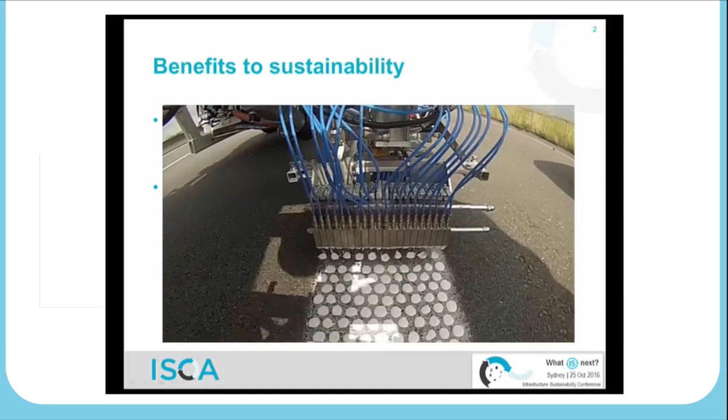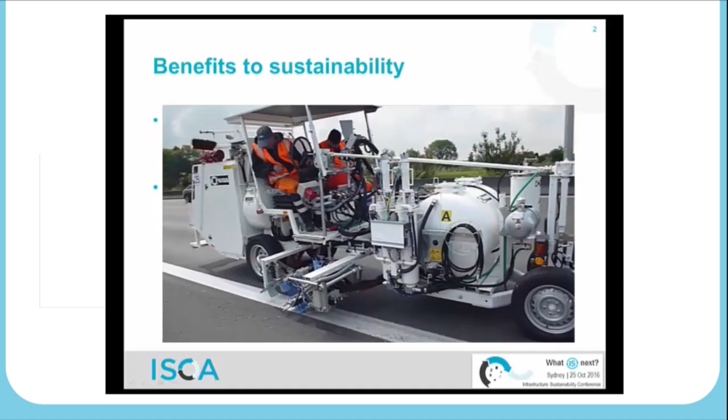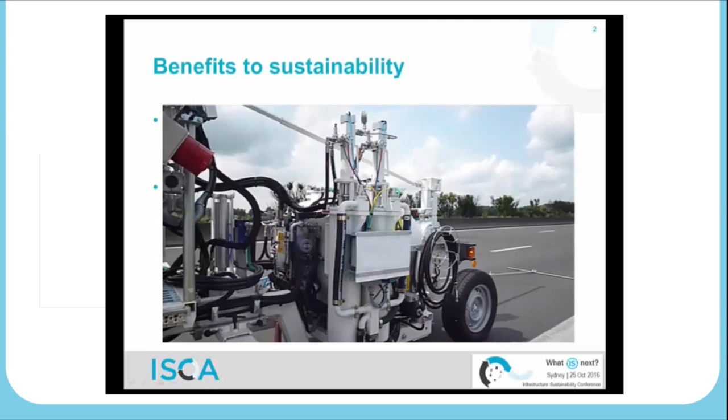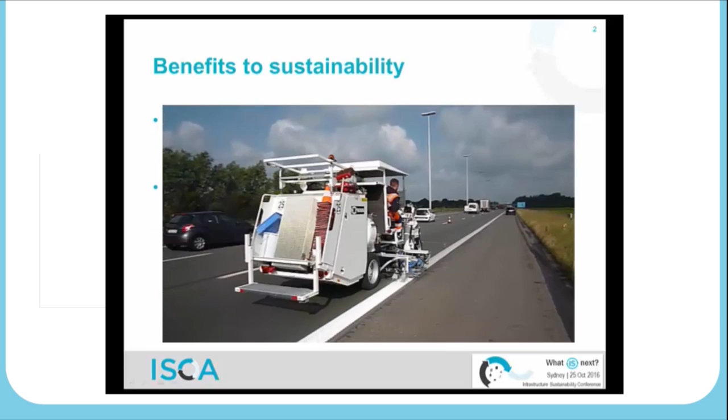We discovered by making minor changes to how we plan and reuse materials, there was an incredible opportunity to innovate our future infrastructure projects for big dollar gains from relatively small type road treatments. Which is why we are here today proposing use of a common road marking material, line marking. We're combining this with new technology and changes to product design. The concept is to swap the currently used waterborne line with cold applied plastic line, or CAP. With CAP, the product life is predicted to be 6 times greater than waterborne. So rather than mark roads every year, why not once every 6 years? Within the Perth metropolitan network, with 1,200 kilometres of roads, this equates to 20,000 kilometres of line marking. CAP's advantage is it enhances existing lines, allowing the reuse of existing lines, therefore saving removal costs.

So what are our sustainable savings in changing the way we mark our roads? By swapping to CAP material, the equipment used to spray CAP line marking equates to a saving of 606,000 litres of diesel, or 271 tonne of carbon emissions per year. However, with our materials in WA freighted in from Australia's eastern coast, once we add the shipping cost to transport material to Perth, the fuel saving increases to 7.1 million litres, or 3,170 tonne of carbon emissions saved per year. Now this doesn't include the fuel of delayed public traffic, or frustration associated with remarking lines, nor the improved safety or reduced maintenance cost.

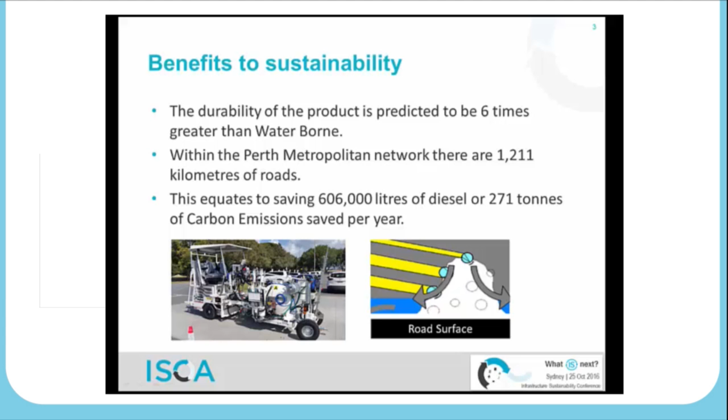Also, we save 200 tonne of line marking material for the Perth metropolitan area over 6 years using cold applied plastic. So when we add in also the potential crash cost saving using a willingness to pay approach, preventing killed and seriously injured crashes, there is a potential saving available of $179 million. Now in closing, what other opportunities do we receive? With a change in product design, we get improved safety. There's clear, better nighttime visibility using a spot design. And combined with driving in wet conditions, there's improved surface drainage, with a change in design going from a flat to spot surface line, where visibility is important, which anyone in Sydney and Melbourne can confirm with your long winters and cold temperatures compared to Perth's.

There's lower consumption of solvent. There's also no heating elements required, which will minimise burns and eliminate additional fuel use. So there's a saving there. And also reduced cleaning work of equipment. And this leads to greater efficiency. Now, what's occurring overseas?

Well, our overseas research comparing available line markings indicates the most environmentally friendly solution is CAP, with the lowest carbon footprint. Now, this study was performed by Dr. Alexander Klein. He looked at water, thermoplastic, CAP and solvent lines.

So how serious are Main Roads, or is this merely a flag-waving exercise? We will commence in November the first large-scale 6-year research trial on freeway standard roads comparing materials that will consider how changes in decisions can lead to better sustainable outcomes. Thank you for your interest.

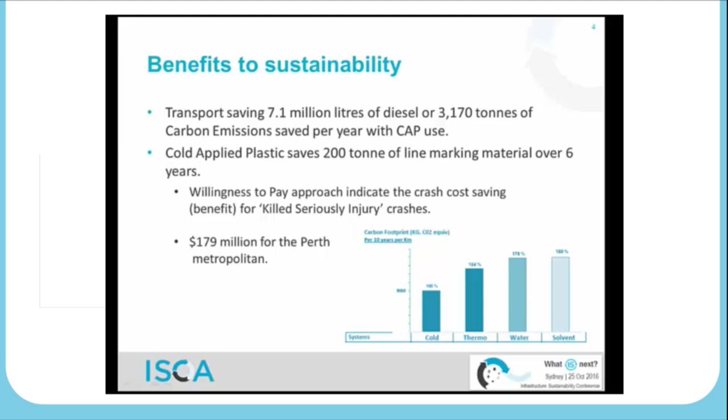Yeah, we've got the clapometer, so we'll use that to score people. Okay, so I think we'll go to Kate Harris now, and I'll pass you the little... All right, you can nick off now. Thanks. Yeah. Well, we haven't got any prizes. Okay, you know, fear really.

Of Donald Trump. So I just want to confirm that, yes, materials, number one, do matter, but there is also a real challenge. I hear the challenge around the supply and demand dilemma all the time. So I'm coming from a perspective of speaking on behalf of a lot of those manufacturers. Good Environmental Choice Australia is the Type 1 independent ISO 14024 eco-label. And I'm just back from a global conference with many countries around the world with the same dilemma.

But today we want to talk about concrete solutions of concrete. And I'm actually speaking on behalf of one of our licensees who's had a certified product for many years with GECA, as we're affectionately known, which is Independent Cement and Lime. And James Howard is here somewhere. So if you throw your hand up so we can all pester you later, James is over there.

So I guess the message today in 5 minutes is quite brief: there are already existing solutions. It's a call for more innovative designs for sustainable production and consumption solutions. We're very committed to SDG 12 and see infrastructure as a huge component of that. And if you have a look at cement and concrete being 5% of the world's CO2 emissions, that's no small figure and leaves a big opportunity for infrastructure to respond and do something about it.

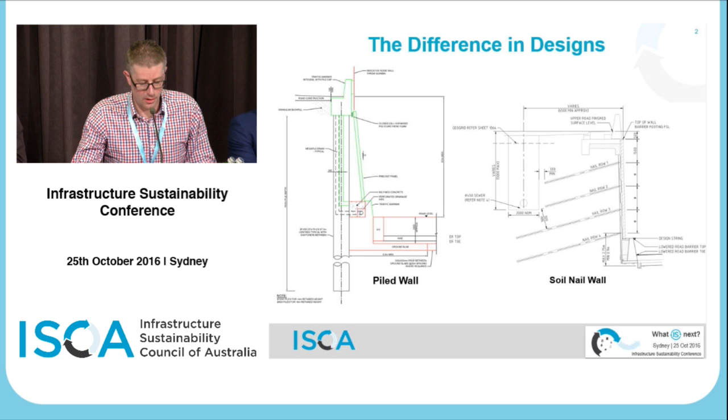Although soil nails have been used extensively in Adelaide before, they were for the old design rules, and they typically have quite closely spaced nails in the order of 1.5 to 2 metre centres, and thick shotcrete, 150 millimetres thick and conventionally reinforced. After an exhaustive amount of design effort and a rigorous independent review, our revised approach resulted in a solution having nails at 2 to 3 metre centres, and also incorporated a much thinner 75 millimetre thick fibre reinforced shotcrete facing without conventional reinforcing. The reduced shotcrete thickness was possible as we developed an alternative design approach which allowed the nails to slip slightly under swelling load, hence relieving any design pressure on the shotcrete.

Here's a summary of the material savings from the final design as opposed to the reference design. For comparison purposes, similar structural elements common to both solutions, such as architectural facades, traffic barriers, etc., have been ignored from material quantities. You can see there was an 87% reduction in total tonnes of concrete, and this flowed through to a 98% reduction in total tonnes of steel reinforcement. This reflects that piled solutions have quite heavy reinforcement, whereas the soil nail solution only has reinforcement locally in the nails themselves and at the nail head locations.

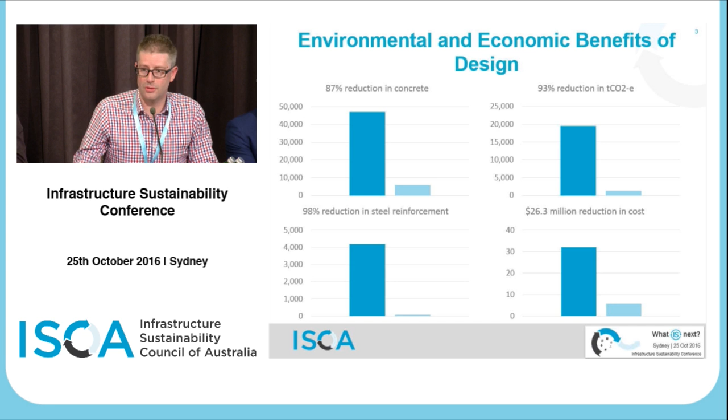From the materials calculated, this resulted in a 93% reduction in total tonnes of carbon dioxide. And, not surprisingly, this has had significant capital cost savings to the project in the order of $26 million between the reference design and the final design. So just to summarise, there are obviously a huge number of social benefits and legacy items. The soil nail wall solution reduced construction time of the retaining wall itself by 312 days, and this flowed through to reduce the overall construction program by about 9 days.

Soil nailing is a lot less noisy and a lot less obtrusive than piling, and as the excavation progresses, the soil nailing occurs below ground level, and you essentially have the cut face which acts as a noise barrier. The revised design rules have now been adopted as DPTI standard, and they're being used on the Darlington project at present, applied to both piled retaining walls and soil nail walls there. Also worth noting that there's 15 kilometres of this corridor yet to be upgraded. The design approach is transferable to other regions where similar soil and climatic conditions exist.

And finally, this revised design approach is being presented to industry through a full-day seminar by the Australian Geomechanics Society and Engineers Australia in Adelaide. This seminar incorporated a number of worked examples, so this has left a great legacy to the industry.

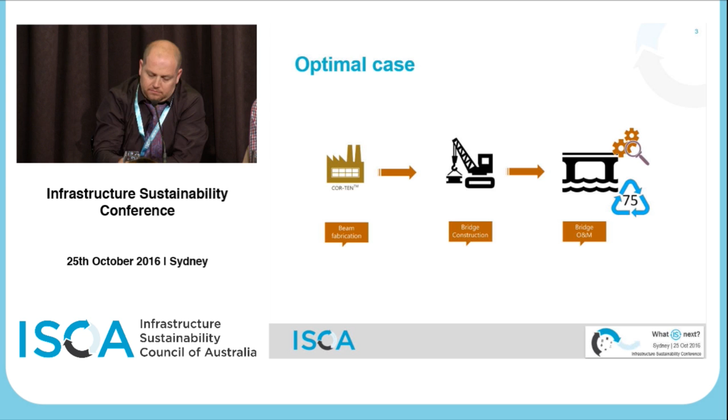But of course, selecting weathering steel for use in infrastructure assets, whether it's bridges or facades or other infrastructure, there's a number of influences that we need to get right, and it really is in the detail. So not everyone likes the look of rusty steel, and it can be a little bit off-putting. Hold on. But then some people do.

We need to consider things like access. So if we've got infrastructure going over large rail corridors or very busy highways or over very busy waterways, we need to consider whether that access is going to create a significant cost over the life cycle of that piece of infrastructure. We also need to consider the environment that we're building that infrastructure over. Weathering steel is not particularly happy when it's exposed to coastal environments, so weathering steel has its limitations in that regard. It really doesn't like to be in environments that are close to the coast, and in that regard you might need to paint it if you were going to use it, so it sort of reduces the benefits.

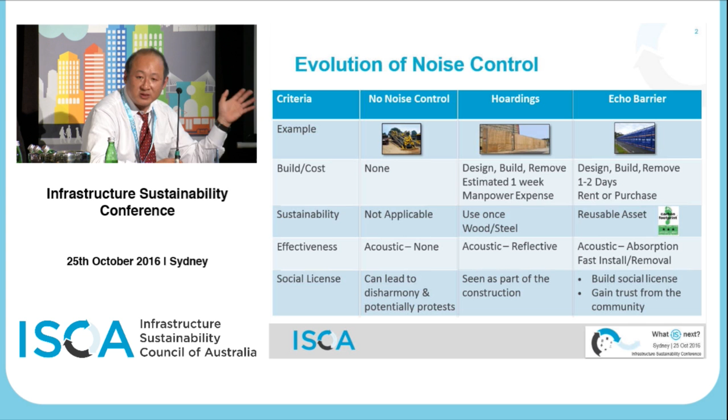Now, net impact of that: with hoardings, it's basically seen as just part of construction. Everyone just sees it as, oh, they're just building something there, and they just put this wood around it, and that's fine. They don't see it as being a way of reducing the noise impact on them. However, because of the bespoke nature of a branded barrier that actually has noise control system written on it, people have a different perception. They basically see that something is being done for me. And then suddenly the angst that people get changes. And it's all about communication and how people get communicated through the visuals of the system.

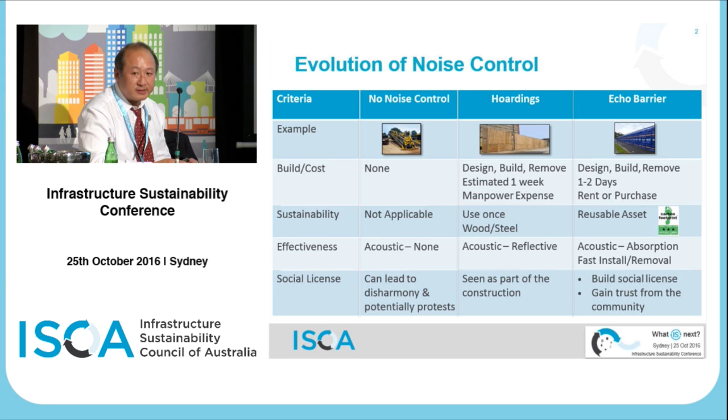Now, I'm going to go through and show you a video now of a project that we did. It was just in a suburb here in Sydney, up in Narrabeen. Yeah, let's go through that.

We're undertaking a horizontal directional drill from Wetherill Street, directly behind us, 800 metres south out into the Pacific Ocean. This drill is for Telstra, which is a telecommunications cable. It's called the Tasman Global Access System, which is linking Raglan in New Zealand to Sydney here in Australia.

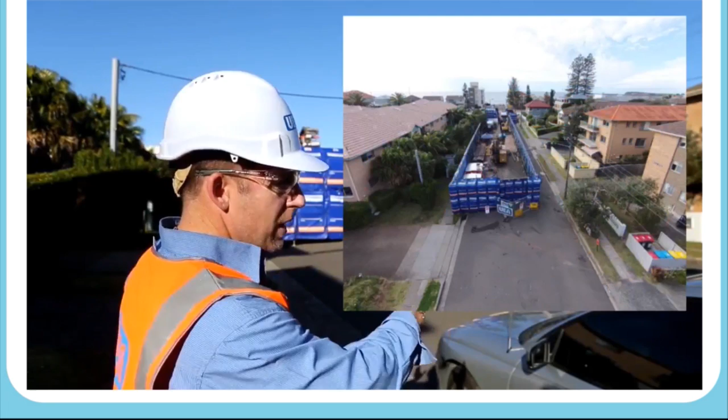Not only has the Echo Barrier itself reduced the noise impact on the local residents, but it also closed our site, which stopped people from looking in, and also provided greater security on our site, and there's a clean, tidy presence on Wetherill Street, which is a very well-kept area.

The little rig that's in the back of the site operates running at 1400 RPM. It gives off about 110 decibels to the side of it. They've recorded on the back corner of this site 74 dB. So we know with the side of our rig being 110 standing beside it, to be 5 metres back and outside the barriers, we have a reduction of 35 decibels. So as far as we can say, this has been a success.

I think he basically saw it in terms of the maximum potential noise versus what he measured. We actually got an independent test survey that showed it to be around about 20 decibels, so he's a little bit generous in terms of his numbers.

Now, I've talked about the technology, what it can do. You can see how it's been used. What I would like to do is just talk about the new opportunities this type of technology can bring to projects and asset owners and project managers. First area I'd like to talk about is community relations. Now, often when they start a project, there is incredible angst in the community. You know, this "no fun for locals" type business published by the Manly Daily. They obviously have a lot of fear because they don't know what's going on.